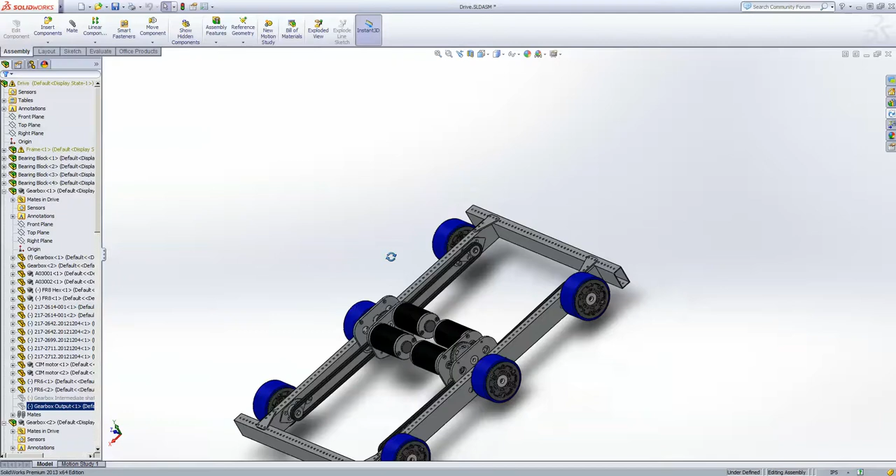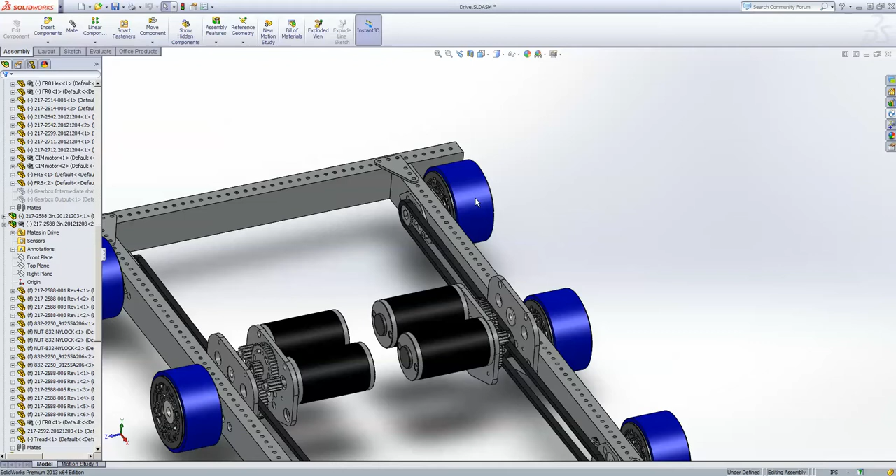Did a lot of things here: added the gearing in the gearbox, missing standoffs, added sprockets, tensioners, chain. All the wheels are now locked in place. I am missing shafts though. There's some lessons I want to teach as we do the shafts, so I will draw the shafts. Maybe we'll do the standoffs in this video, though I don't know if that's the most useful exercise, so maybe I'll just do that and post a follow-up of the finished robot. We haven't decided how we're going to post CAD yet, but we are going to post all the CAD for our videos, and if we do a video on something else, we'll post whatever documentation or stuff goes with it. Alright, so let's jump in.

I think I'm going to start with the gearbox. So let's open that up. I know in the last video I commented that an inch and an eighth apart is great for two Vex gears, and that is true, except I forgot about the chain. So the first point I'd like to make is that when you get these CAD files, you'll see the distance from this plate to this plate is actually not directly dimensioned. That may seem counterintuitive to some, but for this kind of gearbox, if you're making your own standoffs most likely, or even if you're not, my point is somewhat valid, and you'll see that in a moment.

I like to use the components in the assembly and their various spacing constraints to figure out what these plates need to be. Let's say I still wanted to come in and make these nominal standoffs - well, at least now I have a good start, and I'll adjust to the next nominal. Because if you guessed the nominal size from the beginning and you're wrong, you have to go back and iterate, and that 10 seconds you spent making that first mate is wasted, and I really don't like wasting that kind of time. I know that sounds real small, but it all adds up.

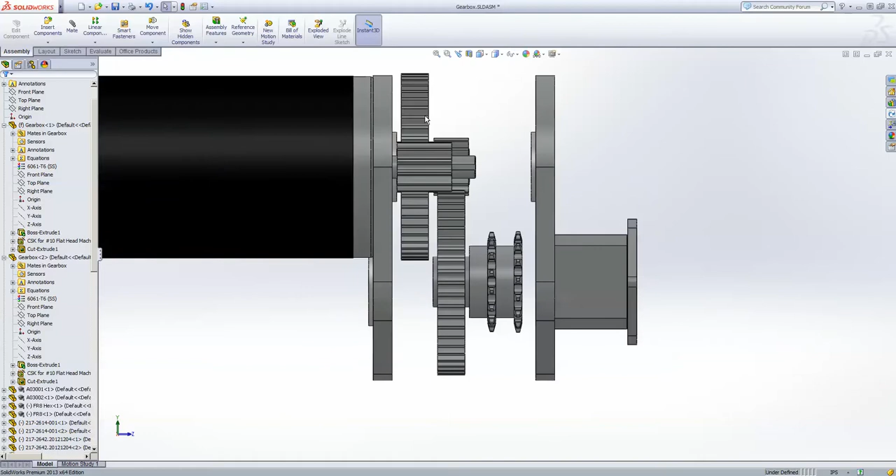So what I did is, this gear has made it to that bearing, and this gear's made it to that. I love that Vex has the planes of their gears properly spaced, so the plane is on center. So this gear has made it to the center of that. Yes, we could move it over a little bit and make this narrower, but I like putting stuff on center. Sprocket has made it to that, sprocket to the next sprocket, and then I did a 3/16 spacing from this sprocket to the face. That's pretty close, and our chain model makes that look pretty close, but it does work. If you ever have concerns, a 1/4 inch spacing is not a bad idea - you're certainly not going to lose regionals because you added a 16th gap to your chain.

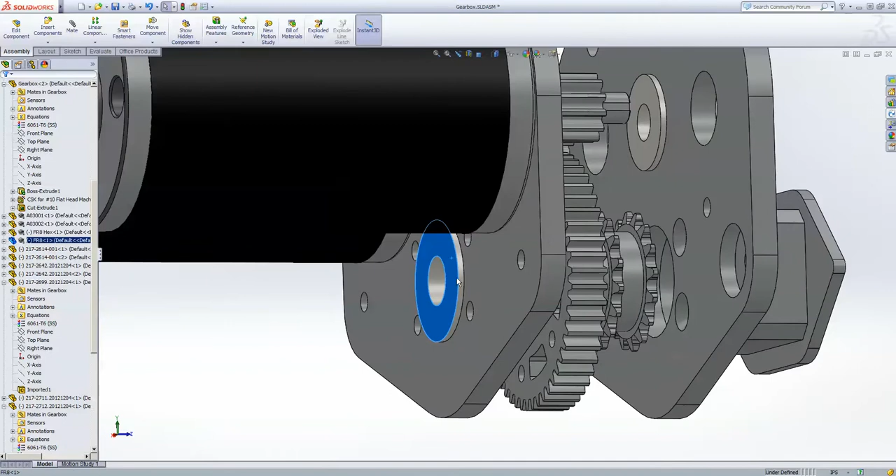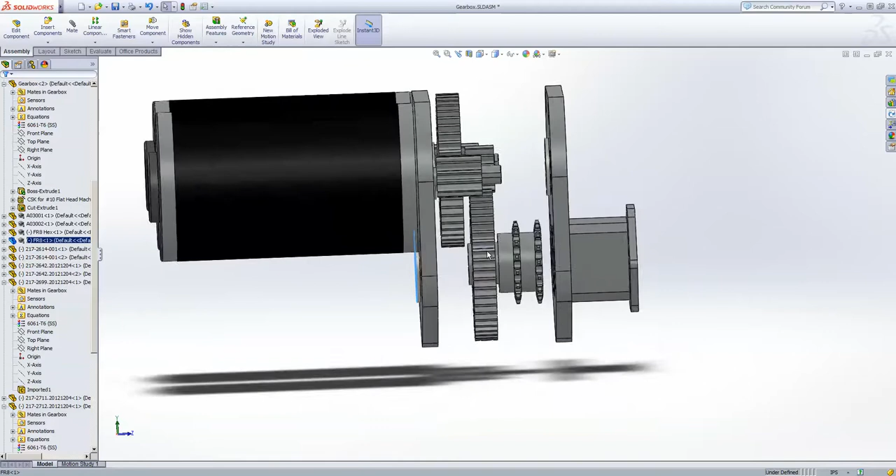So what else did I do here? Oh, in the first video I made this bearing a hex bearing. We don't do that here because, one, we didn't have great access to hex bearings last year - we bought like 40 at kickoff and then realized we couldn't get any more. And two, most of our kids know how to machine, and bearing rounds are one of the first things they learn, so that's easy for us to do. We do a similar trick on the wheels for that. It saved us like $20 per robot, so I don't know that it was really a money savings, but it did free up some hex bearings. So not much else going on in the gearbox, I don't think.

Alright, so we're going to leave the gearbox for now and look at some of the other things.

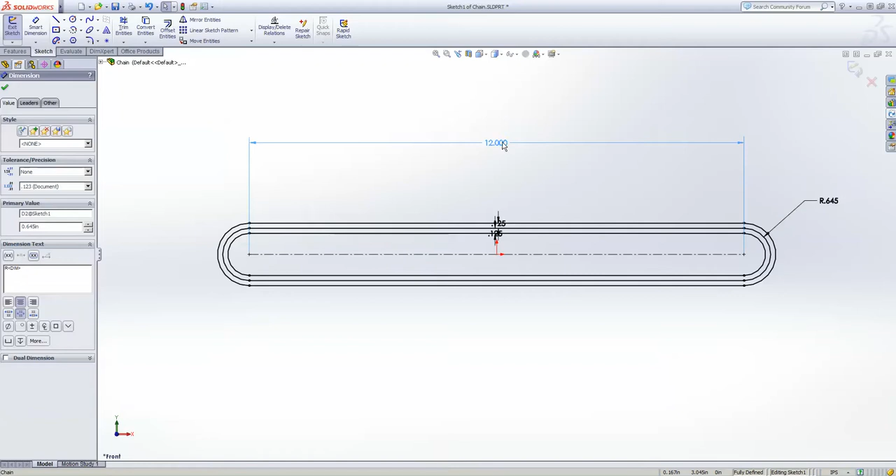So this chain model is something I reuse all over the place, and how I generate this is I just come in and draw the pitch diameter, and use offset entities and do the center to center. You can do it for different pitch diameters too. Obviously, both halves of this are made to be equal, or the same.

And then I extrude that to some number. I don't remember what that number is because I copy and paste this file every time. I guess I have it at 320. It's something we've just measured chain over the years, and these have worked for us. I wouldn't hesitate to make your own version of this a little larger, bigger in diameter and wider, to help exaggerate any clearance issues if you do have some.

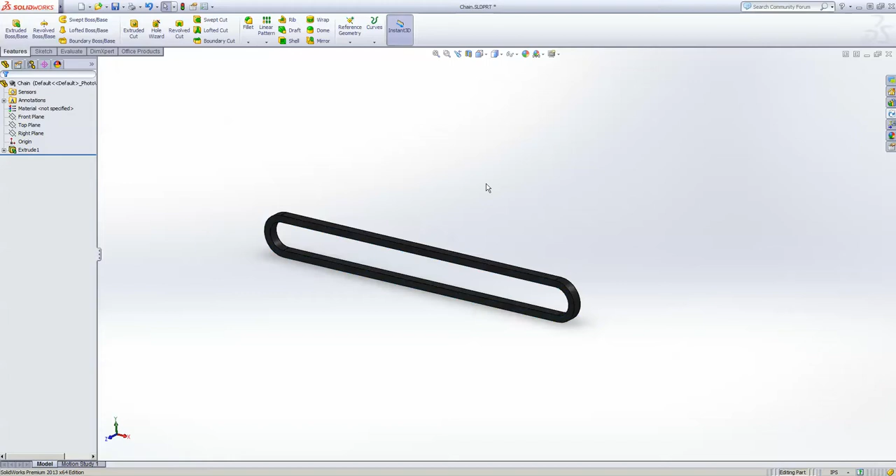Let's see if I did this. I do like assigning mass properties for this. I have not actually - I had an older one of these chain guys that I used to use that was driven by a design table that would also set the mass. Generally during season we will come in and set the mass on those. Now, I want to say 25 chain is nominally 0.1 pounds a foot. I just like having that stuff accurate.

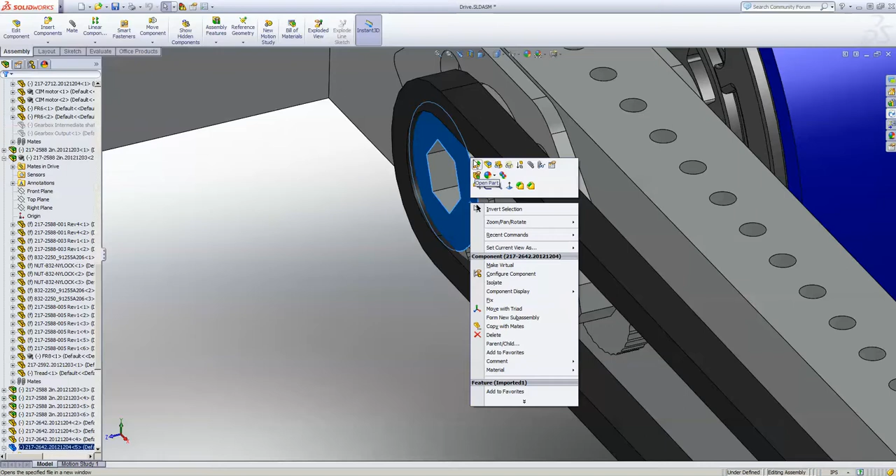So next thing I want to show, I'll just say it, I won't open the CAD file. The front plane of that chain, you guessed it, is not on center, and that ties into the next point. Vex did score points with me by having the front plane of their gear - maybe it was right plane, I don't remember which - centered on the teeth, but they did not do that for sprockets.

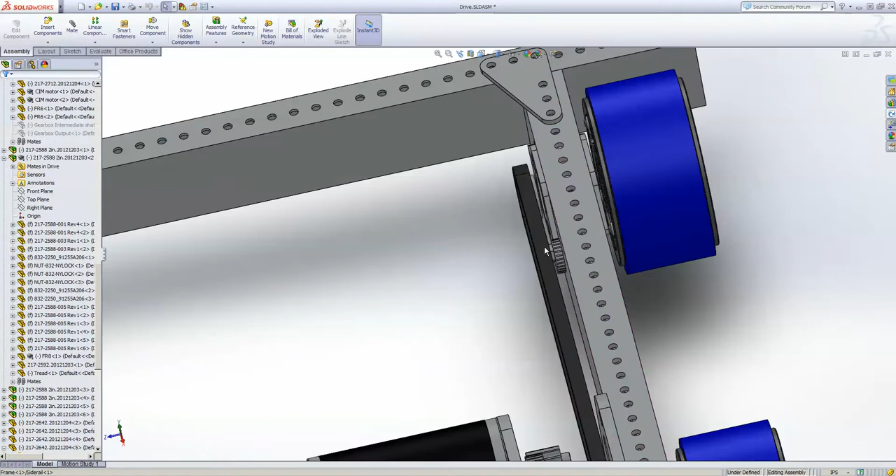It's there, so I added this plane. In hindsight, doing a body move so that the front plane is centered would be a little more intuitive, probably would have been a little cleaner. And I use this plane to come back in the assembly, mate the center plane of that chain with the center plane of the sprocket, and now, based on the sprocket spacing we did here, these outer sprockets are spaced.

So once again, I didn't dimension these sprockets at any distance, I didn't make a spacer, I didn't do any nominal thing. I let them land where they wanted to land, and since it looks like that all works, I'm then going to come in and run with those dimensions and make spacers to match that. If you did want to use nominal spacers, there's some argument to that, and you could kind of do the inverse process there.

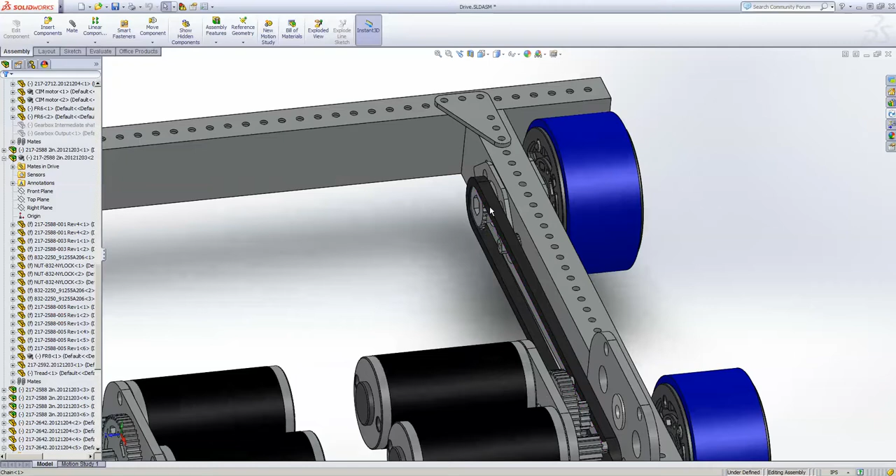The way this drive is laid out, at some point something's got to give, and I don't think you can use nominal spacers everywhere, but for us, making spacers is not a big deal. And if you're only making one of these drives, sanding spacers or something wouldn't be that crazy either.

So what do we want to look at next? I did add these tensioners in. The hole for that, I'll show what I did there - you can look in the original sketch. I have a small hole, 100 thou, just so it's obviously small, so that I get the placement of that hole in the initial sketch.

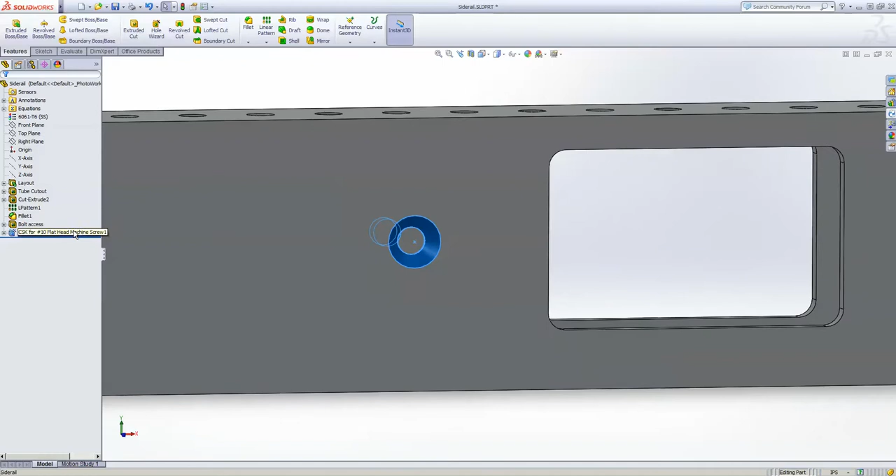But then because that is a countersunk hole, and I do want to show that, I did use Hole Wizard after the fact. I kind of do Hole Wizard wrong in a lot of spots, and I do it right in some spots, so I don't know that you want to trust everything I do there. I think that covers kind of all the changes I've made. If I missed anything, feel free to point that out, or catch that in the CAD when I post that in a couple days.

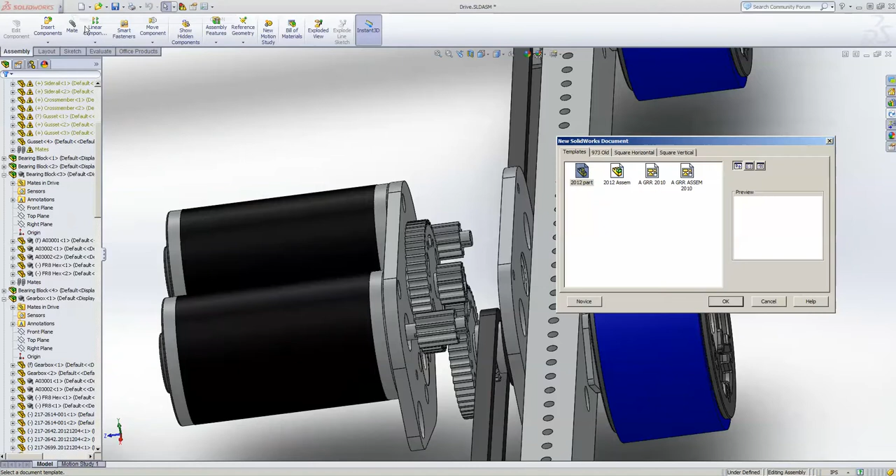So now we're going to come in and do shafts. Our team does a lot of hex shafts, so we're CADing a lot of them, and it's an easy part to make really funky, and it's an easy part that off the top of your head right now you may be thinking you can't make in one sketch - and we are going to do that.

So this is another one I think that some people might find silly or wrong, but it works great for us, and I really like it. So first we're drawing the top shaft in that gearbox. It's just a 3/8 hex in the center with a bearing round on each end, and we're going to add a snap ring groove in later.

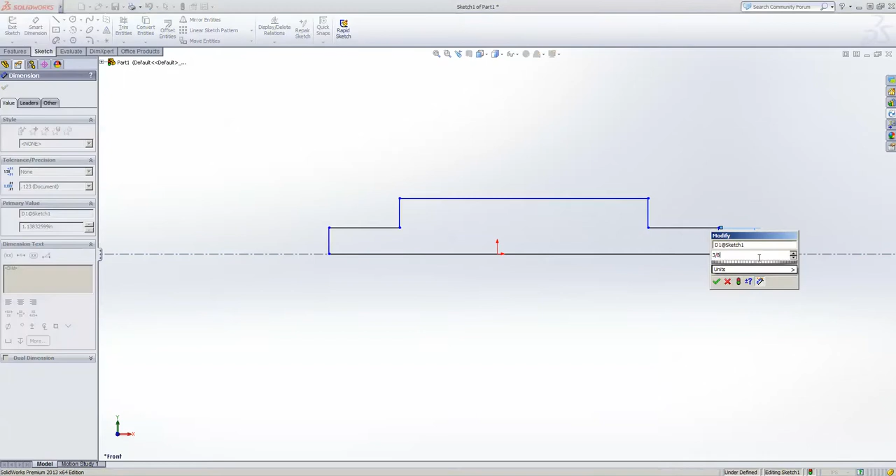For this specific type of shaft and snap ring groove, I like to add the snap ring groove in a second feature. I know that's crazy, hypocritical, yada yada, but forgive me. So you see I'm using a lot of construction geometry again to delete as many dimensions as possible.

And even though this is a 3/8 hex and it's a 3/8 round, I'm going to dimension this at 0.1 for now, and you'll see why I do that in a moment. And I think this is 1.83. Make this centered, actually it's in the sketch, because everything should be symmetrical, and do revolve base to exit this out.

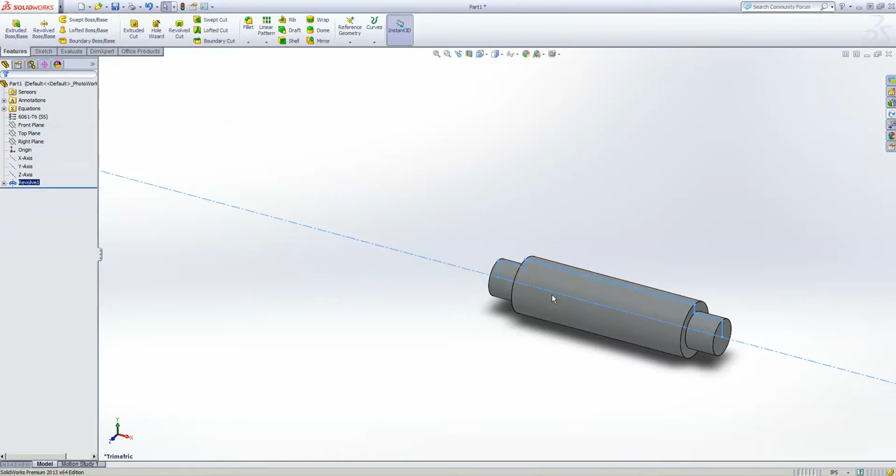For stuff that's real simple, I won't name my features every time because I don't name features for the sake of naming features. I name features so that future Adam or other people can edit parts and understand where stuff is. So if a part is immediately obvious, I don't feel you need to name the feature and waste that little bit of time. At work, however, we name our features on everything. That's just what we do.

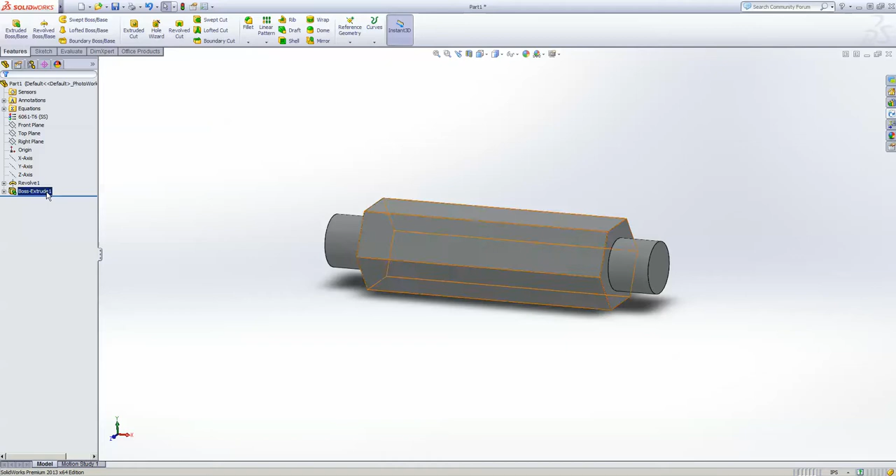So kind of did that without talking about it. I came in on that face, made a co-radial mate between the polygon I drew and the boss so that its size is set by that first sketch. Made it horizontal just because I don't like stuff floating free, and then I extruded it up to surface.

So this feature has no dimensions. It is entirely determined by this feature, and the reason I did this 0.1 is just to make it easier to grab that face and draw on it. So I'll come in after the fact to make that really small.

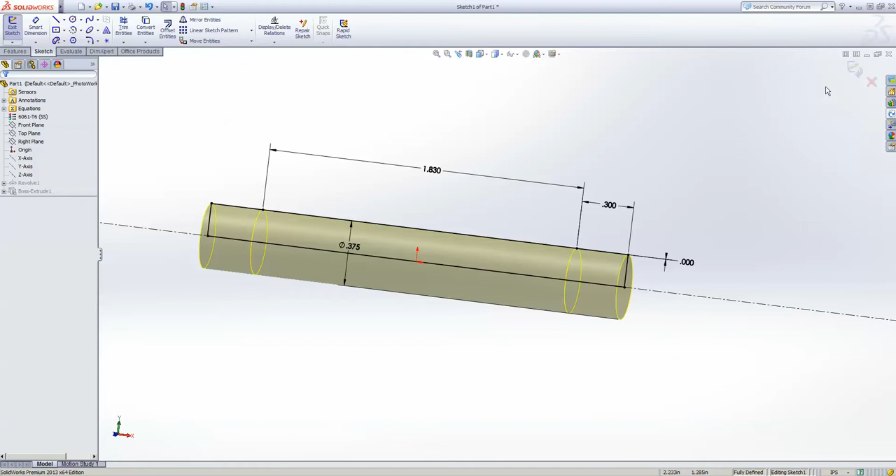So now we have a hex shaft that you can come in and do this. And this works with multiple bodies, multiple hexes. Obviously each hex showing that takes another feature, but they can all be laid out in one feature. And this is wrong in some ways, but it works great for the team, works great for FRC, I think. Because I love having that first feature do everything. I can't reiterate that enough.

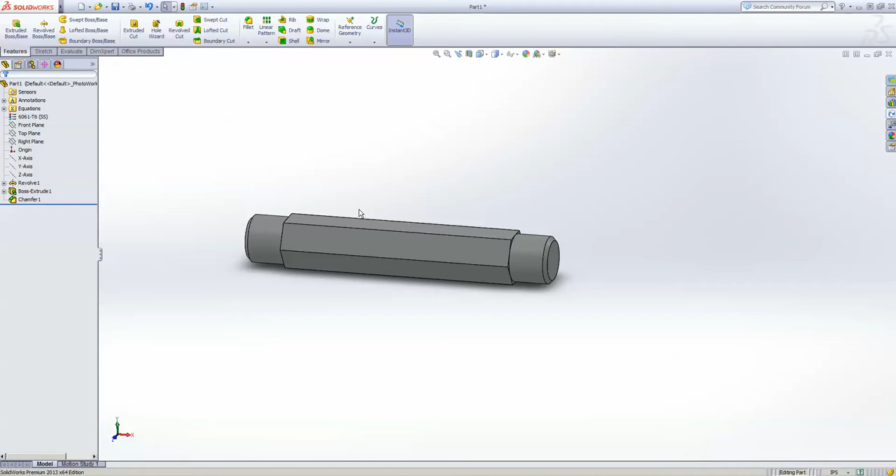Putting chamfers on here. I like showing them in CAD just to help reinforce the fact that we do them. I feel that pretty much every shaft that goes through a bearing in FRC anywhere should be chamfered. Even if you do not have a lathe, you can put it in a drill chuck, like in a hand drill, run it against a file, run it against a sander, or spin the shaft by hand against a sander. Those chamfers will really save you a lot of hassle, so I feel it's real important to do them.

So we're going to save this as gearbox intermediate shaft, kind of skipping all of our part number conventions, and I think that's appropriate for now because that's a whole nother bag of worms.

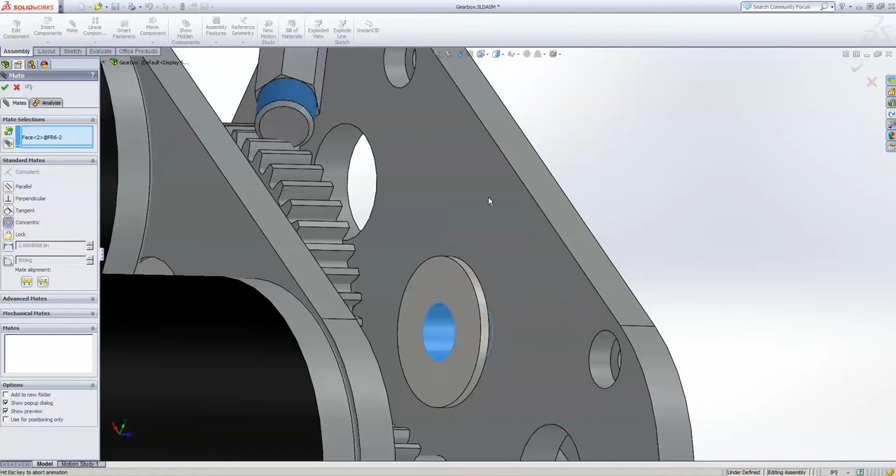So now we're going to come in, put this shaft in. Want that the other way. Oh, where's my shaft? So if you were to come in and measure the distance between the bearings, it comes out to 1.844, and I made this 1.83, if you're paying attention there.

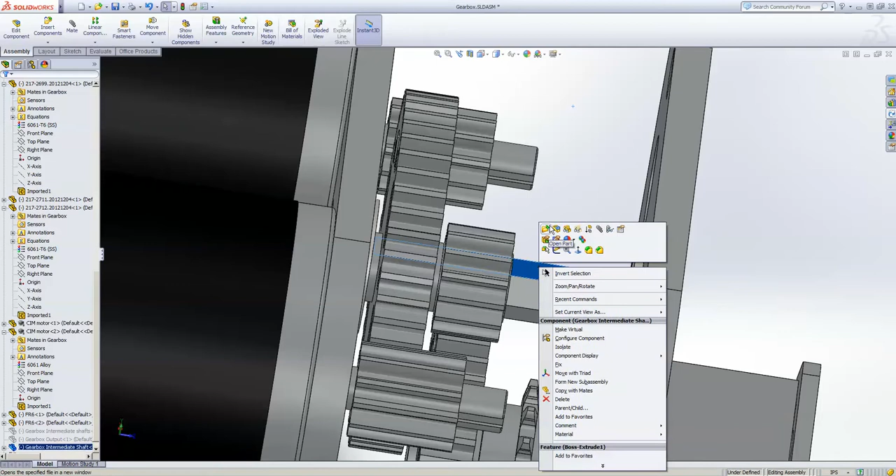So that's 14 thou short. That's good. That gives you some leeway for manufacturing tolerance. Making this any tighter won't give you any benefit, so it's nice to make things loose where you can. Designing something that requires tight tolerances everywhere doesn't make you a good designer. It just means you can tolerance things tight, which I don't see a benefit to. The better designer can make stuff loose and still have everything work.

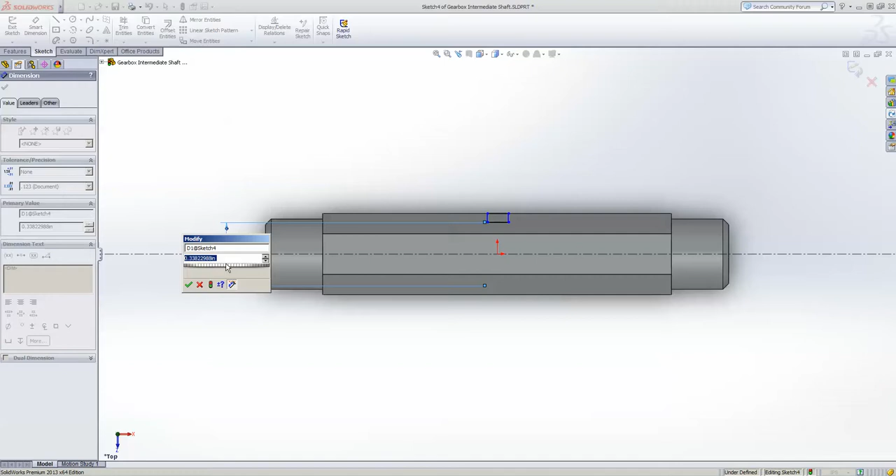So now we're going to come in and draw the snap ring. For the middle of a hex, we actually use the next nominal size snap ring, which in this case would be 7/16. In most of our hex sizes this works out well. Got that number wrong there. For the 3/8 it's a little shallow, and I've debated switching to 10mm snap rings, but probably not going to, because that's another part to have and that sort of stuff.

So I'm just going to guess this 1-inch spacing now and cut this groove and see how it works out. And you'll see that you only get a slight cut, and that's actually totally fine. This works. This worked on our robot last year. We do this all the time.

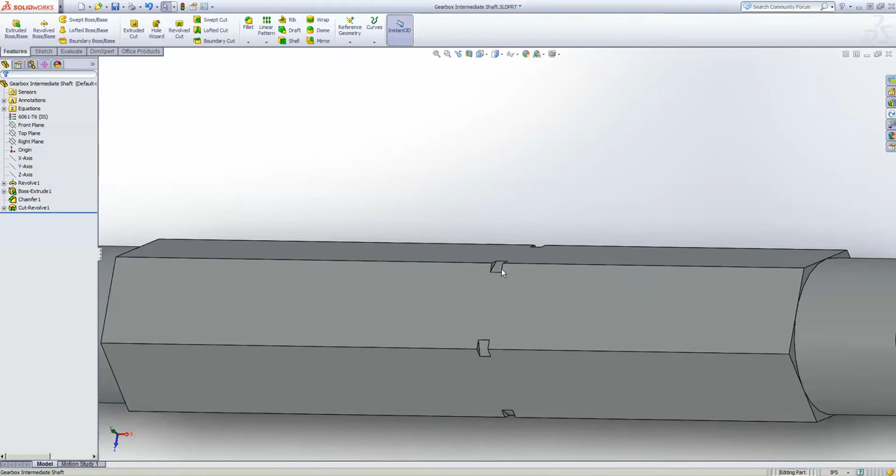This is just so much easier to get to as the assembly person than a full 3/8 step snap ring, which would be smaller diameter than that. And it's just less stress risers you're putting in your shaft, which is nice.

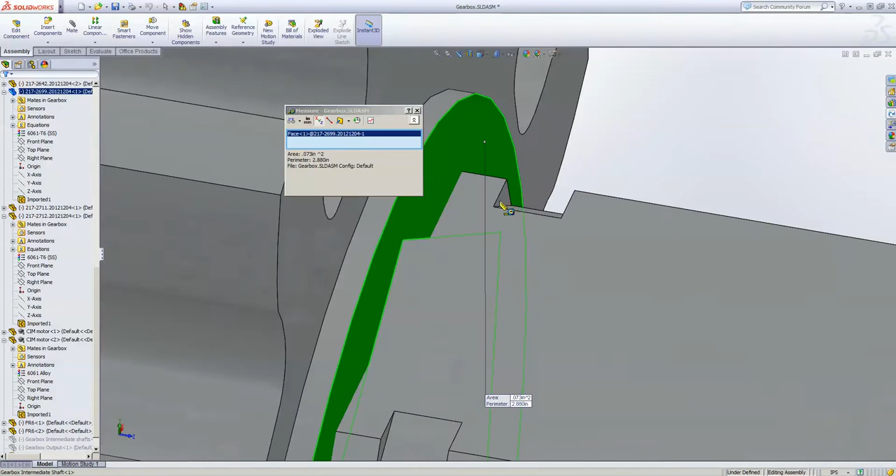So we can see I actually got... well, I wasn't close at all. You can see that's under the gear. So we're just going to iterate that number. Usually I'd like to get in there and measure, but sometimes I feel real lazy and we'll just change it so we can get it to measure. See what this number is. That's 19 thou, maybe we'll pull 10 thou out of that. Even though that totally would work as is.

Alright, so now we have an intermediate shaft rebuild. Did that not move, or did that go the wrong way? It did go the wrong way. So, like I said, I make mistakes all the time.

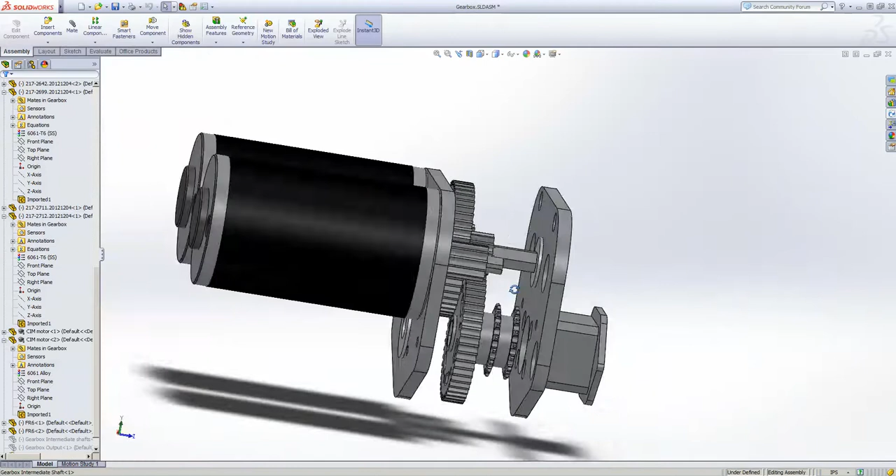Cool, so that shaft's done. Another thing to do would be the output shaft here, so let's start on that.

This one points out a little more use of construction geometry and is a little more complicated at first. So on the left side we have a snap ring groove, to a 1/2 inch bearing round, to a 1/2 inch hex, to another 1/2 inch bearing round. You'll see why we do that in a little bit. To another snap ring groove.

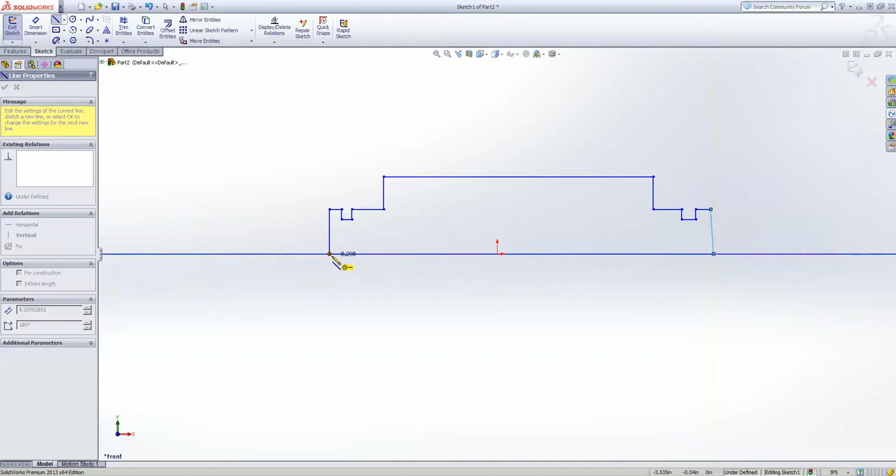And I missed the vertical on there. So I want these to be collinear equal. I want these 4 to be collinear. These 2 to be equal. And these 2 to be equal.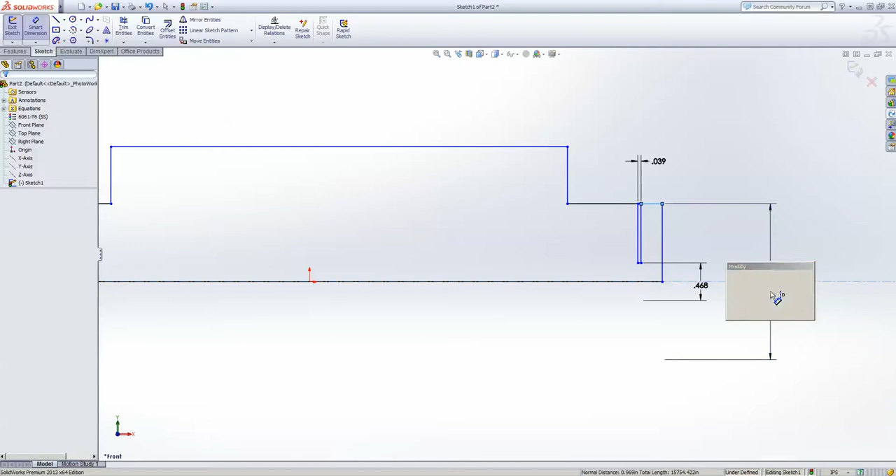Actually, there's some argument maybe later you'd make to not having those equal, but not a big deal for this video. And of course you should have all of your snap ring groove sizes memorized. But if you don't, McMaster actually has them pretty easy to get to under the product detail tab on their snap rings.

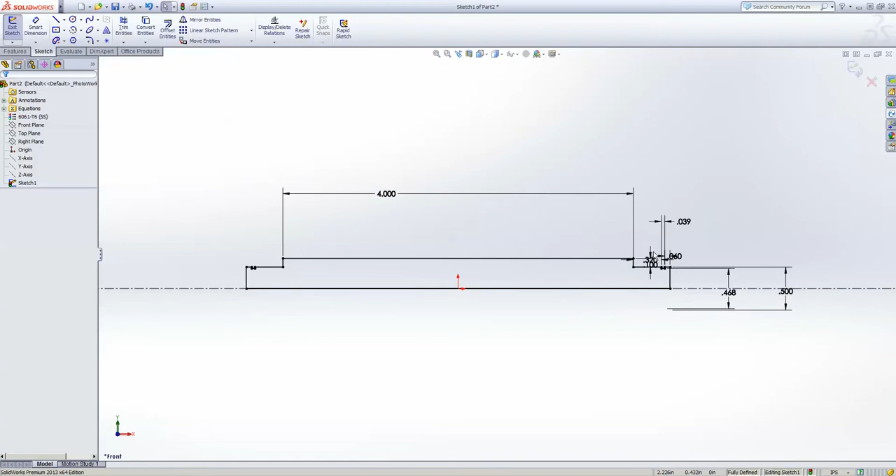And I'm just going to guess a lot of these lengths again, because usually I have a little better idea of dimensions coming into things than I do in these videos. But if you don't, there's no hesitation in just guessing something and coming back and iterating that. And I made this center body dimension - maybe it makes more sense to dimension between the bearings. Not a huge deal for this video. As long as you guys are tuned into, you should dimension kind of what makes the most sense for whatever you're iterating.

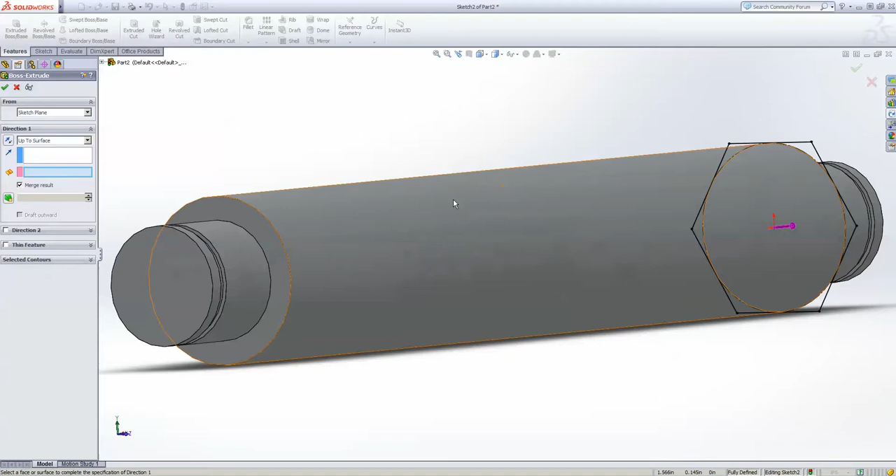So once again, I'm going to come in and draw this hex. Make that co-radial, make that horizontal. You could make it vertical, but just do horizontal, doesn't matter. Up to surface, and then come back in and edit that first sketch. And you technically could start with this at 1/2, but it just makes it really hard to come in and draw the feature that we just did.

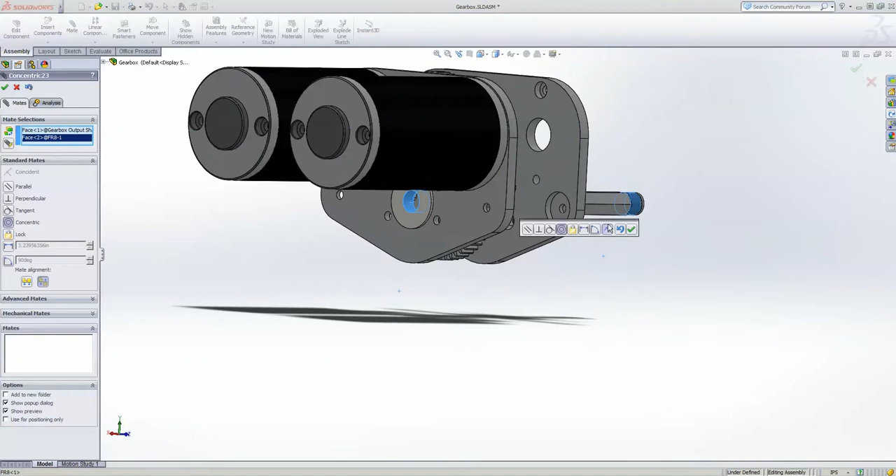Alright, so now that we have this modeled, we're going to put this in the assembly. And you'll see what I was talking about in the first video about snap ring grooves and that bearing being backwards to hold that in. So this snap ring would keep the shaft from coming out this way.

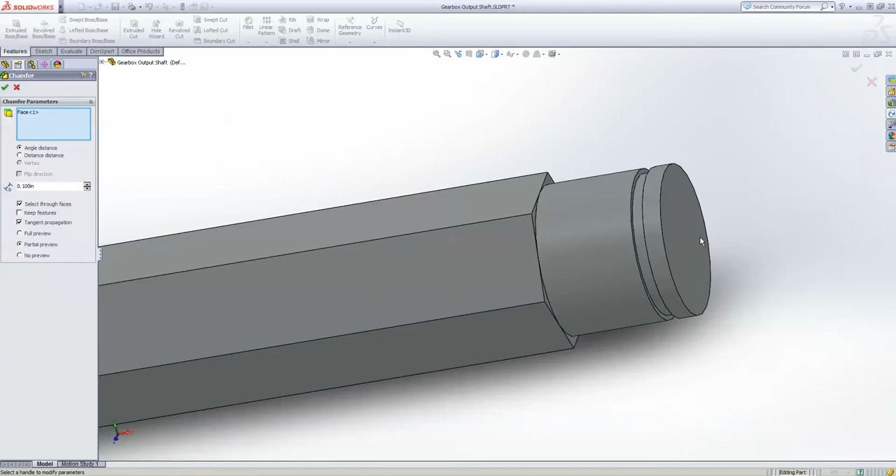And I noticed we missed chamfers, so just to drive the point home that everything should be chamfered, do that. And you notice you can click the face, you don't have to click the edge, although I missed it at the edge that time. Oh no, it's because I'm hitting the edge behind it. Oh, now I'm looking all sorts of amateur. Usually I'm pretty good about hitting the face, and that saves a lot of time - or saves 2 seconds, not a lot of time, but that adds up.

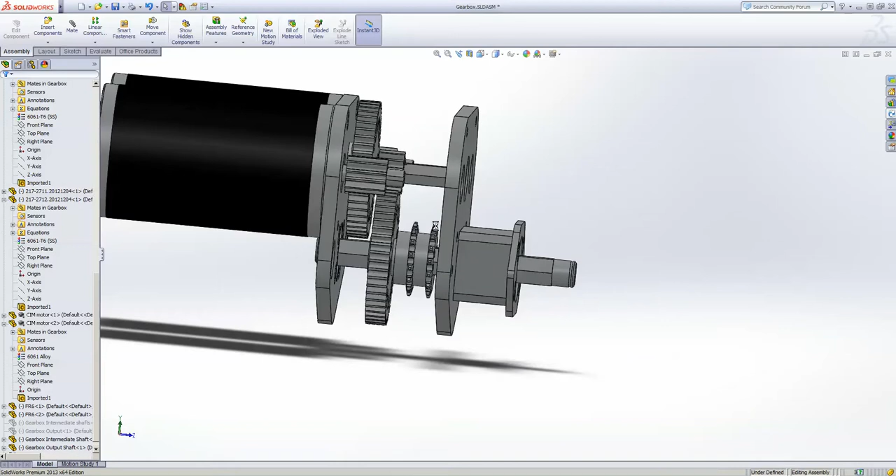So we'll come back into the top level assembly and measure that. Some people would complain that, oh, that's not good, that's loose. How did that mate that back up? Oh, because that was probably mated to that other bearing, yes. Some people might complain that this is not mated to that. I don't think that's a big deal, and it just wastes time to fix that. But if that bothers you, you can come back into my models after the fact and fix that for me.

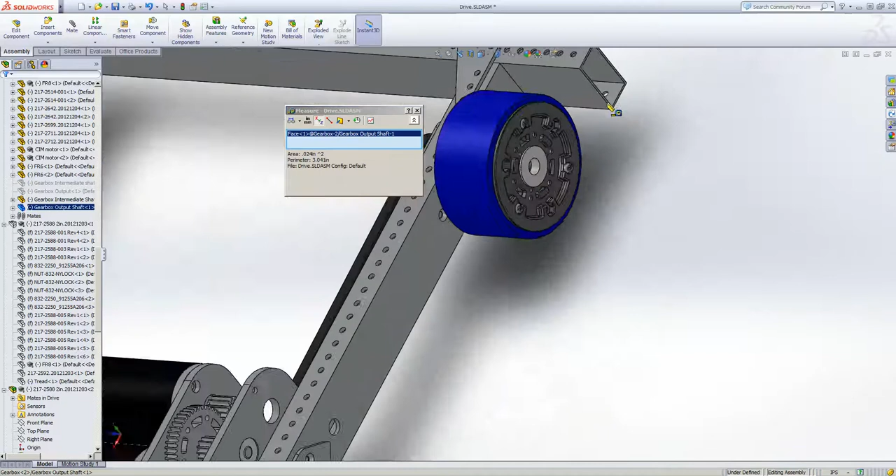So now I'm going to measure, and I'm just going to hide this wheel actually to make it easier, and I'll measure off another wheel. Hide components is one of my favorite ways to get in to measure stuff because it's so easy to undo. Transparency kind of bothers me on some things, so I don't like doing that. So I'm going to measure off that snap ring face to this outer bearing. And I'm getting 1.282, so I'll probably make the shaft 1.3 longer because, you know, there's some slop in those Vex wheels.

Or manufacturing slop, all that adds up. Much more though, and you'll probably start running into trouble with throwing chains. Although on the center wheel that doesn't affect anything, the spacing here doesn't affect our chain on this shaft.

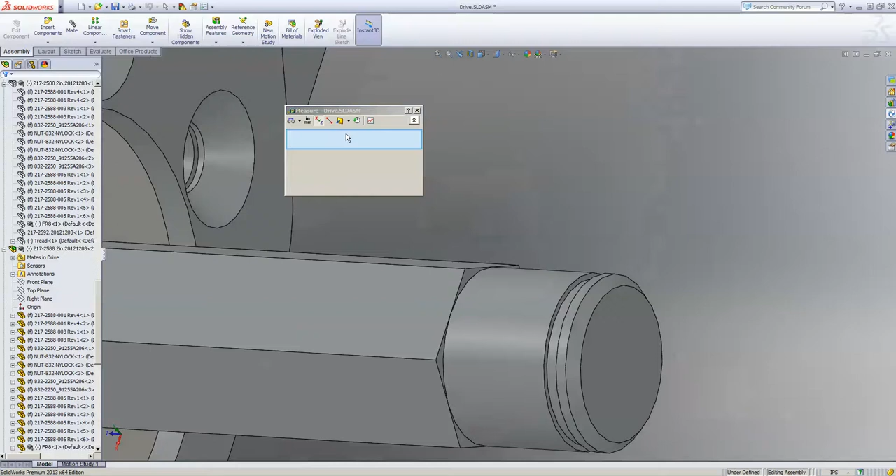I don't know why my measure's not going. I don't know what's going on there, so I'm going to save and rebuild, which... oh yeah, it wasn't letting me measure because it was waiting for a rebuild.

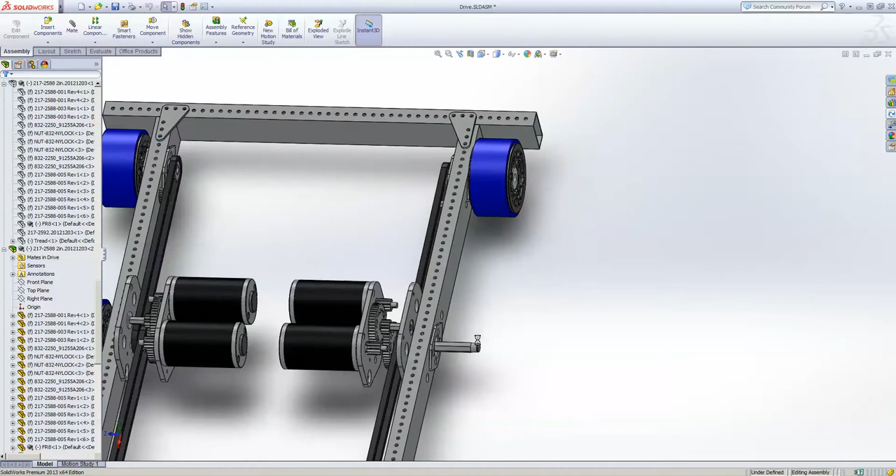Some people commented that I don't use any keyboard shortcuts and I could save a lot of time if I did, and you are right. I use the hell out of keyboard shortcuts, and I have a mouse with a bunch of buttons mapped to keyboard shortcuts. But if I did that for the videos, you guys couldn't see what tools I'm selecting, so I decided not to do that. Keyboard shortcuts are great, I very much agree with you guys on that.

So now we will do a very similar process to make the outer shaft. Actually, I think we'll skip drawing the outer shafts. I'll just say that the outer shafts are a good place, since you can tell one is a little bit longer than the other, to use configurations.

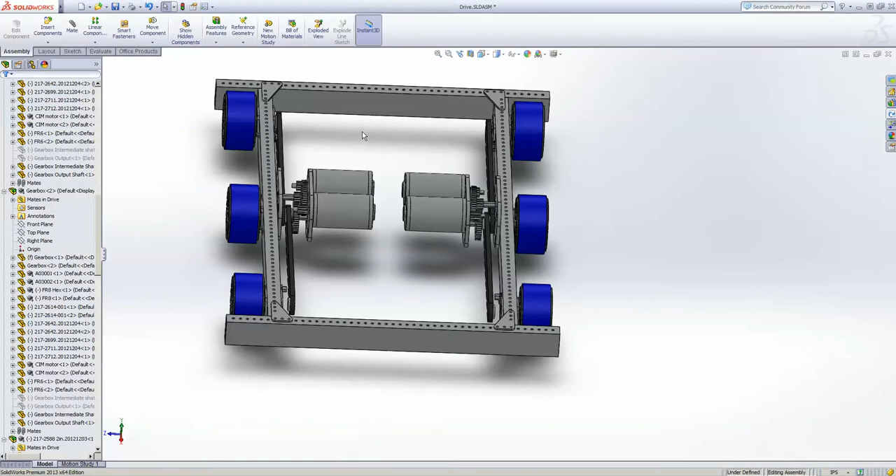I'm going to have a video dedicated just to configurations, all the dangers that are there. Configurations can cause a lot of problems if not used right, but there's a huge potential payoff if they are used right, and a huge time savings. I'm sure there's a lot of people doing things really manually now that could be saved with configurations. There's also some gotchas - configurations might wreck teams that have part numbers for everything and unique files for everything. There's a trick I do that's really ugly or really elegant, depending on how you look at it, that helps get around that problem.

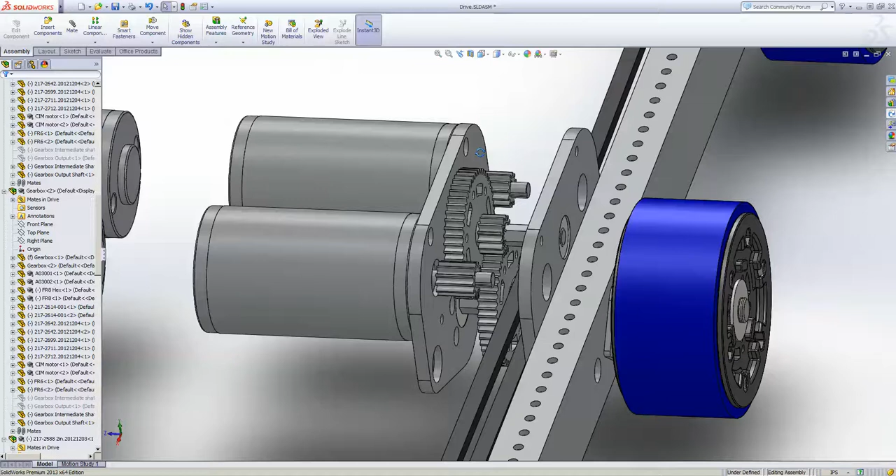So I'll let you guys on your own do those outer shafts and come in and do standoffs. I'll just say the dimensions of these standoffs if anyone's really interested in them. This upper one is 3/8 tubing we buy off McMaster that has, I want to say, a 235 thou ID. That's something we ripped off of 254 a while ago.

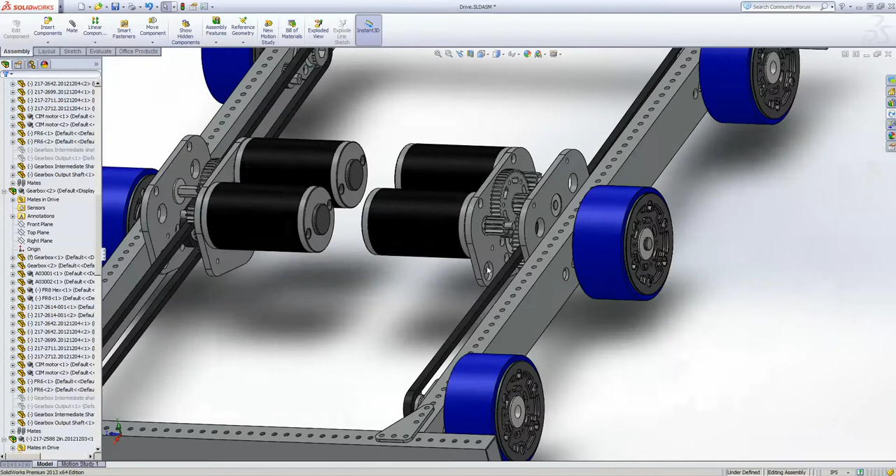This bottom one is 3/4 OD, 16th wall, whatever that ends up as. We don't get that off McMaster, we just get that with regular metal. But McMaster does have that or something similar. You don't have to use those numbers though - you could do whatever and change the bosses.

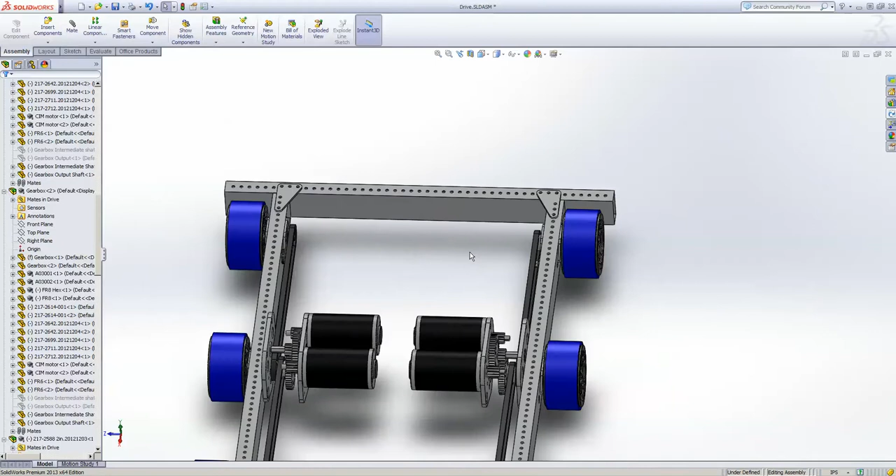For spacers, I do not like to use hex broach spacers because it's just a lot of extra work. We have a couple drill sizes already pulled out in shop that correspond to the slip fit over a 1/2 inch, the slip fit over a 3/8 in terms of hex. So all of our spacers actually are straight, and that really saves a lot of manufacturing time, and that's never really been a problem for us. We have the round size drill that is a nice fit.

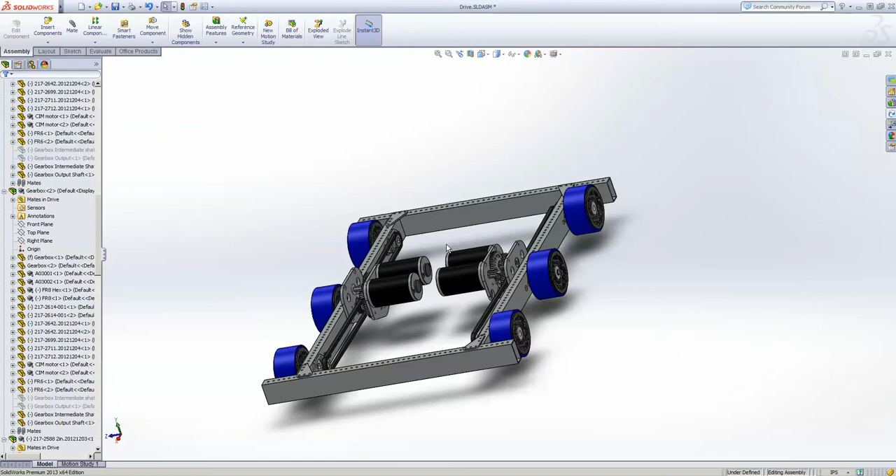So unless I'm forgetting something, I think we finished this drive. The point of these videos really wasn't the drive; it was to show kind of an overall strategy I use for doing the basic design. Obviously the big takeaway here is do as much as you can in that first sketch where it makes sense, and for when you want to come in later and delete parts from an assembly, kind of mate stuff to itself as much as possible.

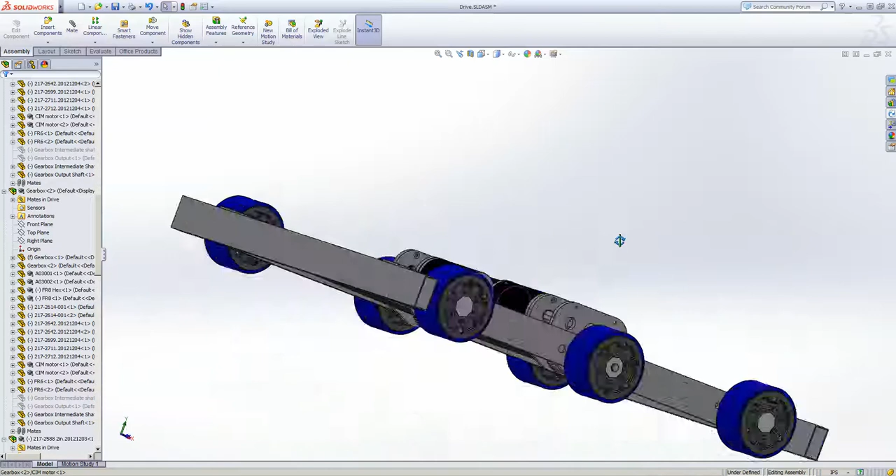Damp Robot on Team 100 recommended the copy with mates tool. That's something I did not know about, and actually would have been good for some of the things I did here, and I'm going to do that in the future. It's always good to hear stuff like that - you really can learn something about SolidWorks from almost anyone. So I always like to ask that question when I meet someone: what's your favorite SolidWorks trick?